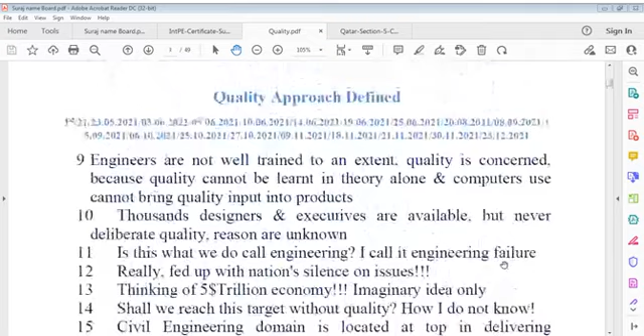This is a new proposal today. Quality in Bharat, India, where does quality exist? That is the question here. Quality hai kahan? And we discussed about this some.

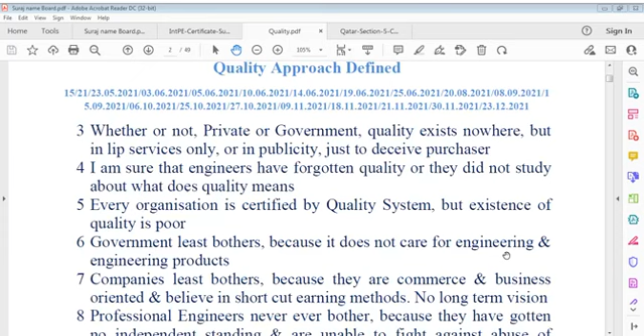Just degrees are not adequate, you can say, even if it's a doctorate, until the engineer's attainment or engineer's educational standards and practical aspects tally together.

If your work does not prove that it is quality one, in that case we have to conclude that our education is not up to the mark it should be. Some defect lies in education, and that defect is that we are not oriented on the practicalities of engineering, but just a theoretical approach is adopted, and we think this is a milestone we have achieved.

If someone has got BE or a first degree in engineering, or then a second engineering degree which is master's, or the top engineering degree which is doctorate, as far as degrees are concerned, it's nice to have as many as possible, but the degree of experience is something different, I think.

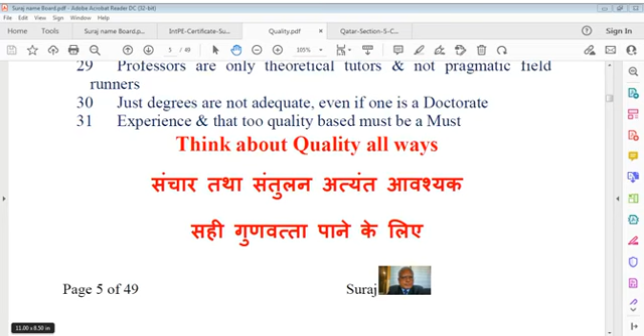New designs come in. But as far as the civil engineering world is concerned, permanent works are not only for years, it is for life. Yes, I am talking of roads and not very much interested because you have to repair it every year. But for structures, I'm talking structures which are meant for many, many decades to come, where our savings, you can say life savings, go on to be invested in. Otherwise, we can't get development work done. That's behind this consideration here.

Try to explain because of the seriousness in this case. And we have here our file of concrete. We can say it's talking about concrete.

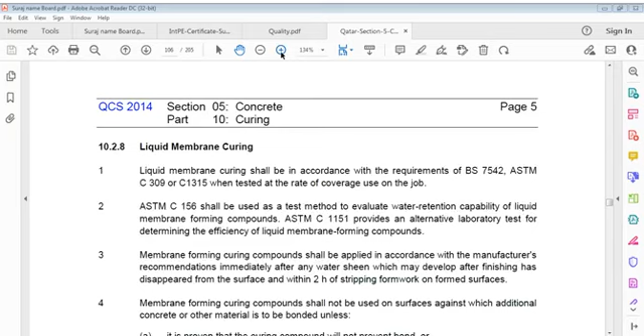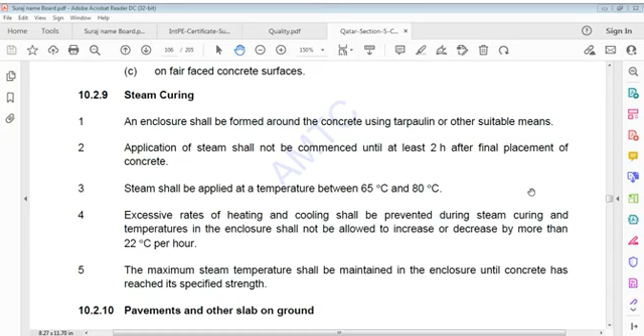Last time we talked about liquid membrane, and we can say steam curing, we talked of about 65 to 80 degrees Celsius, and fluctuation in temperature not to exceed 22 degrees Celsius per hour, and maximum steam temperature to be maintained in the enclosure until concrete has reached. And we talked of bridges, pavements and other slabs on ground, and then building bridges and other structures. Additional curing shall be provided after removal of forms.

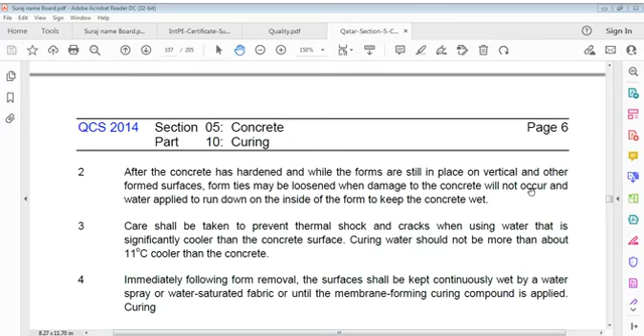So we discussed about that also, about the 11 degrees difference of temperature. We said the very important point was 11 degrees, that curing water should not be more than about 11 degrees Celsius cooler than concrete. It's an important point. If concrete is 35 degrees Celsius, for example, 35 minus 11 is 24, so water should be 24. If concrete is 30, same way it should be 19. Likewise, this is just the range, and not more than that.

Mass concrete we discussed, and we discussed about how these specific materials work.

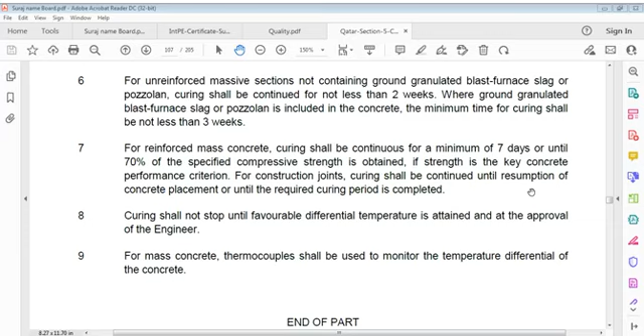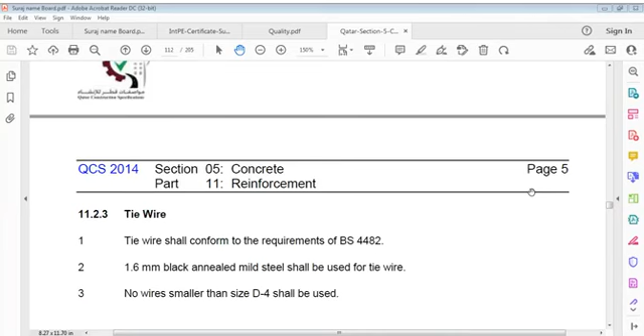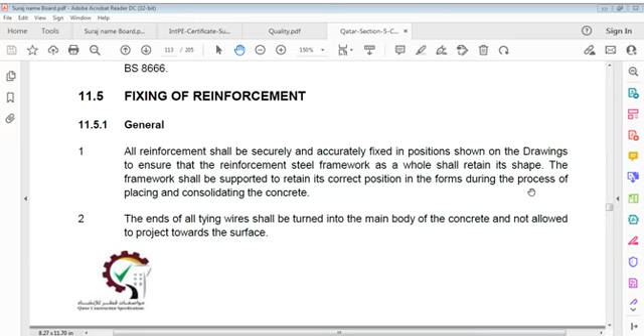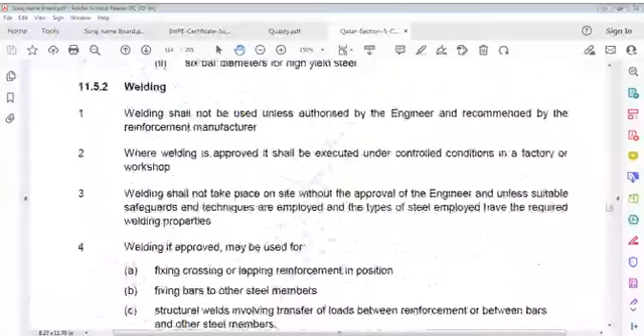We talked of welded steel wire fabric and tie wire, cutting and bending of reinforcement, fixing reinforcement, mechanical splices, and bundling and splicing of bundle bars. So we can say welding, I think we are done. Let me read it better, so we will know what we did and what we didn't.

For welding, welding shall not be used unless authorized by engineer and recommended by reinforcement manufacturer. So this was done. Where welding is approved, it shall be executed under controlled conditions in a factory or workshop.

Where welding is approved, it shall be executed under controlled conditions in a factory or workshop. Welding shall not be done on site without approval of engineer, and unless suitable safeguards and techniques are employed, and types of steel employed have the required welding properties.

Welding, if approved, may be used for fixing crossings or lapping reinforcement in position, fixing bars to other steel members, and structural welds involving transfer of loads between reinforcement or between bars and other steel members.

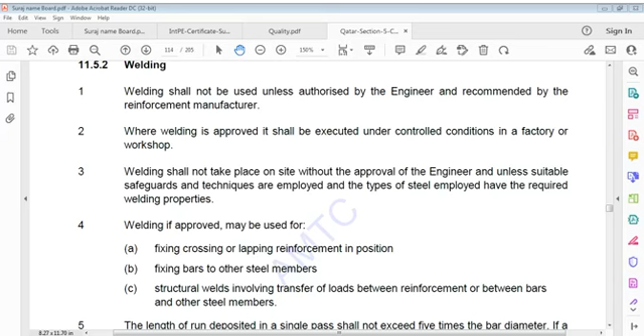Length of run deposited in a single pass shall not exceed 5 times bar diameter (5D). If a longer weld length is required, welds shall be divided into sections with the space between runs made not less than 5 times bar diameter.

Butt welds shall be formed by flash butt welding or metal arc welding. Other methods may be approved subject to satisfactory performance in trial joints. Metal arc welding or electrical resistance welding may be used for fixing suitable steels or for lap joints. Flash butt welding shall be executed with correct combination of flashing, heating, upsetting and annealing, using only machines which automatically control this cycle of operations.

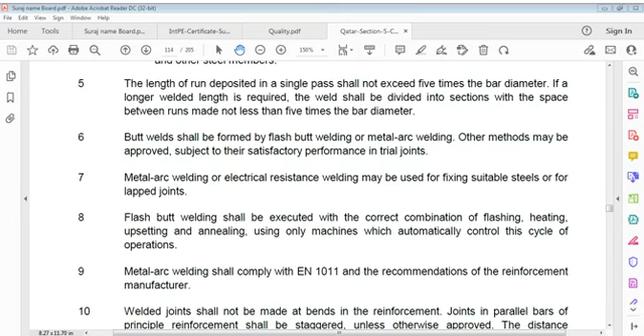Metal arc welding shall comply with European Union EN 1011 and recommendations of reinforcement manufacturers. Welded joints shall not be bent, and welded joints shall not be made at bends in reinforcement. Joints in parallel bars of principal reinforcement shall be staggered, and shall be not less than an anchorage length apart.

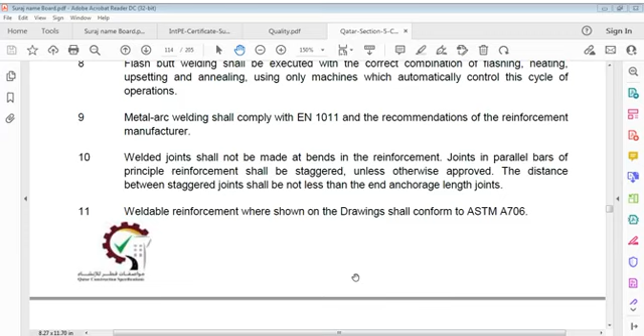Weldable reinforcement, where shown on drawing, shall conform to ASTM A706. Mechanical splices shall comply with BS 8666 and shall be used as and where indicated on drawings. Details of mechanical splices shall be submitted to engineer for approval.

Bundling and splicing of bundle bars shall be in accordance with BS 8666. Splicing, except where indicated on drawings or approved, shall not be permitted without approval of engineer.

Contractor shall notify engineer at least 24 hours before commencing fixing of reinforcement in order to facilitate inspection of formwork. Contractor shall ensure that access areas to receive reinforcement are cleaned before fixing.

Reinforcement to be fixed shall not be placed in contact with non-ferrous metals. Concrete cover to reinforcement shall be maintained with the aid of approved spacer pieces. Cover shall not be less than given in Section 5 Part 6.

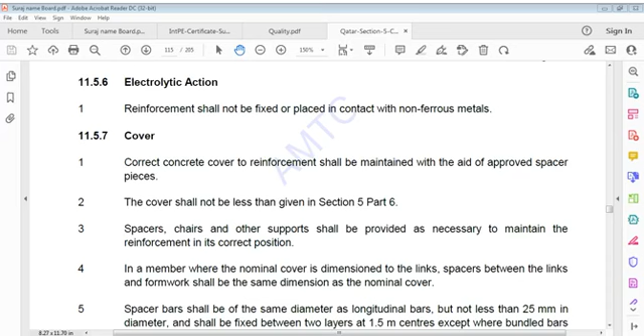Spacers, chairs, and other supports shall be made of concrete, plastic, or other materials, to the approval of engineer. Where supports are made of concrete, they shall have at least the same cube strength as the concrete.

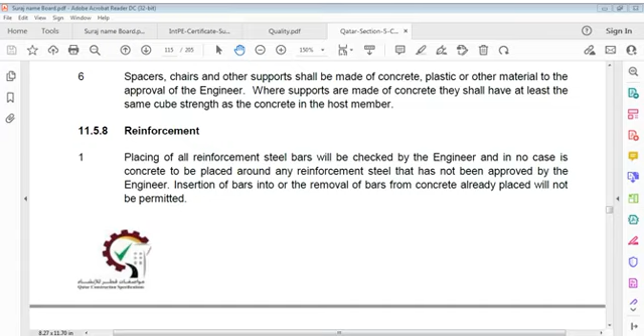Placing of all reinforcement steel bars is to be checked by engineer, and in no case is concrete to be placed around any reinforcement steel that has not been approved by engineer. Insertion of bars into, or removal of bars from, concrete already placed is not permitted.

I think we had gone through this already, but I'm just reading it again. Reinforcement steel temporarily left projecting from concrete at joints shall not be bent without prior approval. Damage to forms and linings shall be avoided. Reinforcement shall not be fixed until completion of placing tanking membrane protection.

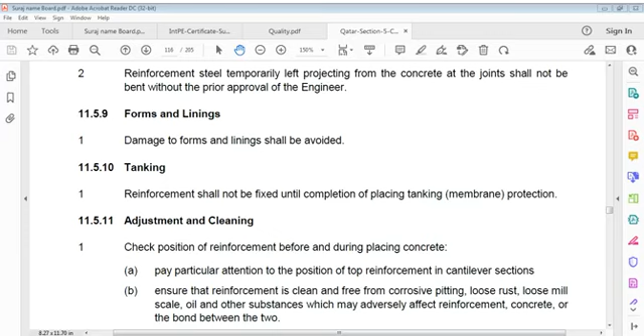Adjustment and cleaning, checking the position of reinforcement before and during placing of concrete. Adjustment and cleaning is a very important point, done before and during concrete placing. Pay particular attention to the position of top reinforcement in cantilever sections.

We have done this. Sorry, some problem in my throat.

Ensure that reinforcement is clean and free from corrosive pitting, loose rust, mill scale, oil and other substances which may adversely affect reinforcement concrete or bond between the two.

Protect projecting reinforcement from weather where rust staining of exposed concrete surfaces may occur.

At time of concreting, all reinforcement steel shall have been thoroughly cleaned and freed from all mud, oil, or any other coating that might destroy or reduce bond.

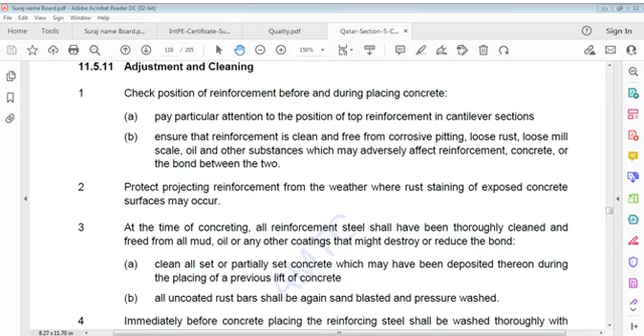Immediately before concrete placing, reinforcing steel shall be washed thoroughly with high pressure potable water jets to remove any deposited salts.

Protective coating to reinforcement. All foregoing clauses of this part apply equally to epoxy coated reinforcing bars. Reinforcing steel which are to be coated shall be free of slivers, scabs, excessive pitting, rust, grease, oil, and other surface defects detrimental to proper coating. Surfaces shall be prepared in accordance with ISO 14654.

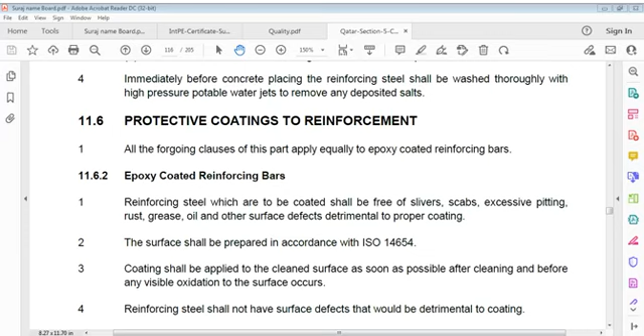Coating shall be applied to cleaned surfaces as soon as possible after cleaning and before any visible oxidation to surface occurs. Reinforcing steel shall not have surface defects that would be detrimental to coating.

Epoxy resin powders which do not meet these requirements must be tested by an approved independent testing laboratory and must be accepted by engineer before use.

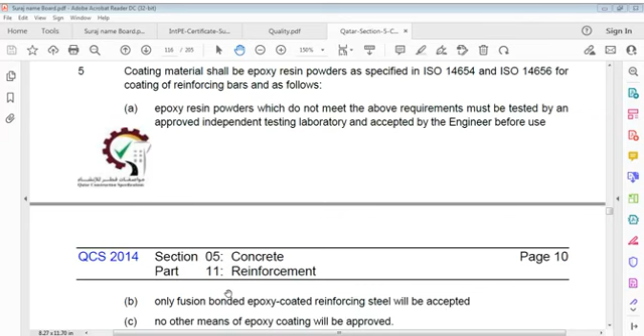Only fusion bonded epoxy coated reinforcing steel shall be accepted. No other means of epoxy coating shall be approved.

Patching material shall be furnished by epoxy coating manufacturer, compatible with coating, inert in concrete, suitable for repairs to coated reinforcing bars, to be made by coating applicator and contractor at project site.

Fabrication shall be performed before coating except as hereafter specified for bent bars and straight bars less than 7.6 meters long. Bent reinforced steel bars shall be coated after bending unless fabricator can show that satisfactory results can be achieved.

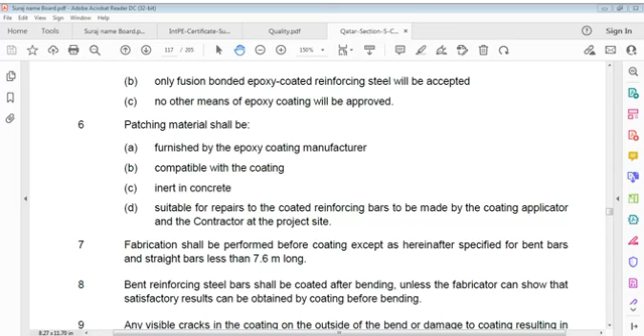Coating on outside of bend or damage to coating resulting in debonding of coating after bending shall be rejected. Bars less than 7.6 meters long may be sheared or sawn to length after coating, provided damage to coating does not extend more than 12mm back.

Cut end is patched before any visible oxidation appears. Flame cutting shall not be permitted.

Epoxy coating shall be checked visually after cure for continuity of coating and shall be free from holes, contaminations, cracks and damaged areas. There shall not be more than 2 holidays, pinholes not visually discernible, in any 300mm of epoxy coated bar.

A holiday detector shall be used in accordance with manufacturer's instruction to check epoxy coating for holidays. A 67.5 volt detector such as Tinker and Rasor model M-1 or approved equivalent shall be used.

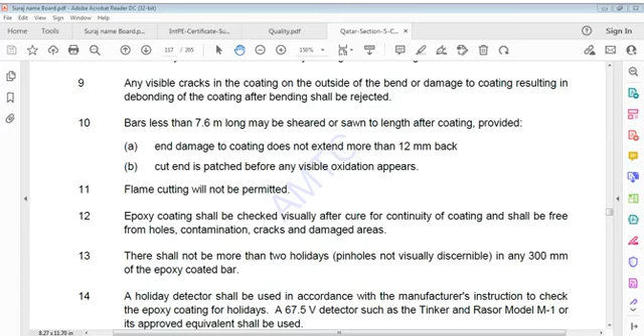Patching of holidays is not required if there are less than 3 holidays per 300mm length. Bars having 3 or more holidays per 300mm shall be cleaned and recoated or replaced.

As directed by engineer, epoxy coating film shall be cured and or post cured to a full cured condition.

Representative proportion of each production lot shall be checked by epoxy coating applicator using method most effective for measuring cure, to ensure that entire production lot of epoxy coating is supplied in full cured condition.

Contractor shall repair all coating damaged by fixtures used to handle or support bars in coating process as follows: patching shall be done as soon as possible and before visible oxidation occurs. Excessive patching requires correction.

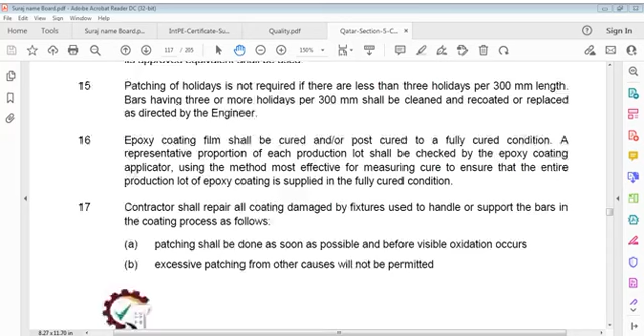Satisfactory correction shall consist of proper adjustment of process and rerunning bars through plant.

Engineer reserves right for access to epoxy coating applicator's plant to witness epoxy coating processes for project work and to obtain specimens from test bars for whatever testing desired.

All chairs, tie wires and other devices which are used in connecting, supporting, securing or fastening epoxy coated reinforcing steel bars shall be made of or coated with dielectric material.

All chairs, tie wires and other devices used in connecting, supporting, securing or fastening epoxy coated reinforcing steel bars shall be made or coated with a dielectric material.

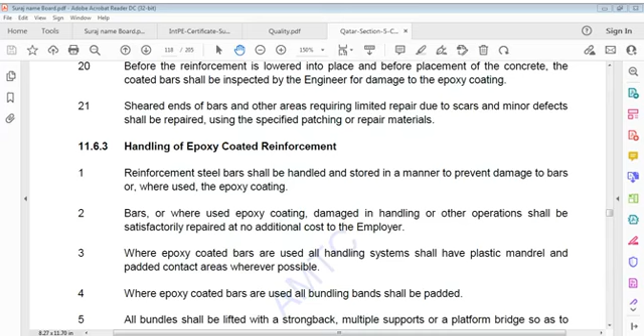Reinforcement steel bars shall be handled and stored in a manner to prevent damage to bars or wherever used, the epoxy coating.

Reinforcement steel bars shall be handled and stored in a manner to prevent damage to bars or wherever used epoxy coating. Bars or epoxy coating damaged in handling or other operations shall be satisfactorily repaired at no additional cost to the employer. Where epoxy coated bars are used, all handling systems shall have plastic mandrel and padded contact around contact areas where possible.

Where epoxy coated bars are used, all bundling bar bands shall be padded. All bundles shall be lifted with a strongback, multiple supports, or a platform bridge so as to prevent bar to bar abrasion from sags in the bar bundle.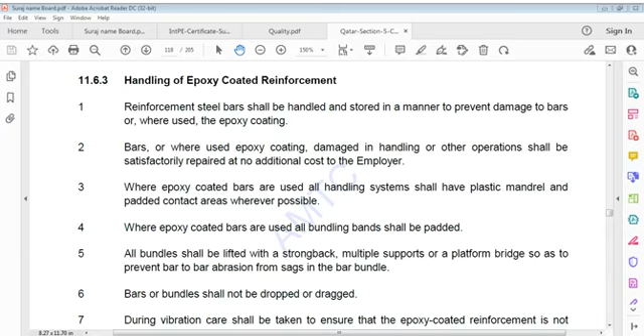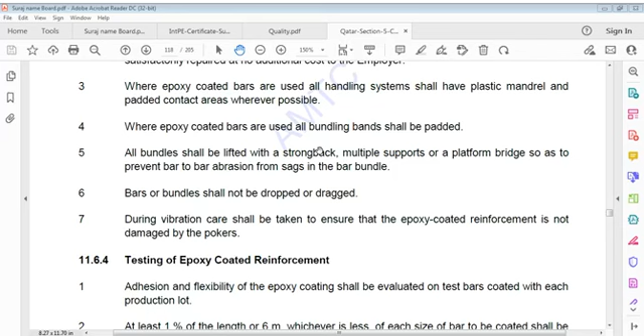Bars or bundles shall not be dropped or dragged. During vibration, care shall be taken to ensure that epoxy coated reinforcement is not damaged by pokers.

Testing of epoxy coated reinforcement: adhesion and flexibility. Adhesion and flexibility of epoxy coating shall be evaluated on test bars coated with each production lot. At least 1% length, or 6 meters, whichever is less, of each size of bar to be coated shall be furnished as test bars. Test bars may be in one length or multiple lengths as required to have one test bar of each size with each production lot.

Production epoxy coated test bars shall be evaluated by bending 120 degrees after rebound around a mandrel of diameter corresponding to the size of the bar, as given in the table.

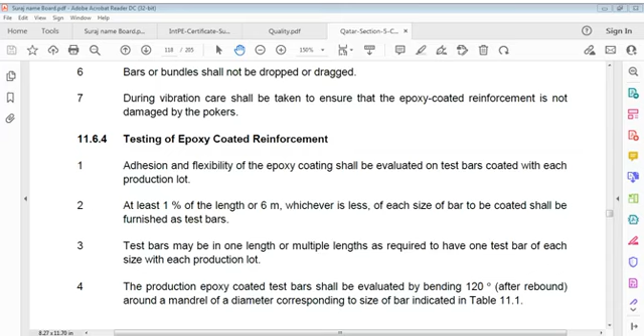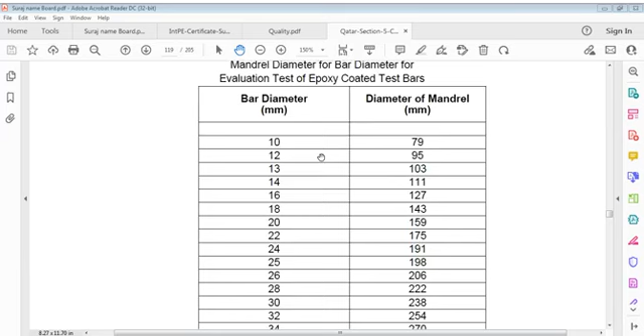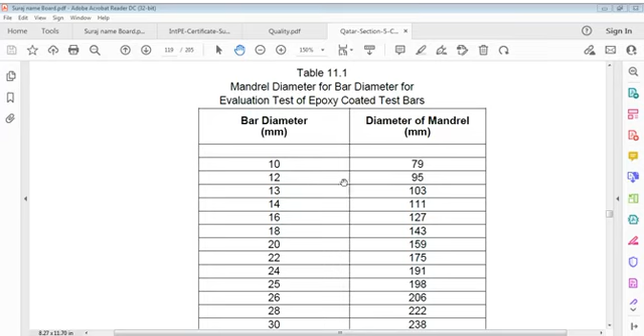Of course, we have gone through this again. For 10 mm the bar diameter corresponds to a mandrel diameter of 79, for 12 mm it's 95 - that's the bar diameter and mandrel diameter relationship. For 10 mm it's 79, for 12 it's 95, for 13 something similar, for 14 it's 111, 16 is 127, 18 is 143, 20 is 159 - approximately 8 times the bar diameter. I think it's about 8 times, maybe slightly less than 8 times approximately. But I understand the relation between mandrel diameter and bar diameter is approximately 8 times. For 10mm it's 79 (close to 80), for 12mm it's 95 - likewise about 8 times, generally speaking.

The bend shall be made at a uniform rate and may take up to 1 minute to complete.

Bend test shall be conducted at room temperature, between 20 degrees Celsius and 30 degrees Celsius, after the specimen has been exposed to room temperature for sufficient time to ensure it has reached thermal equilibrium. No cracking of the epoxy coating shall be visible to the naked eye on the outside radius of the bent bar.

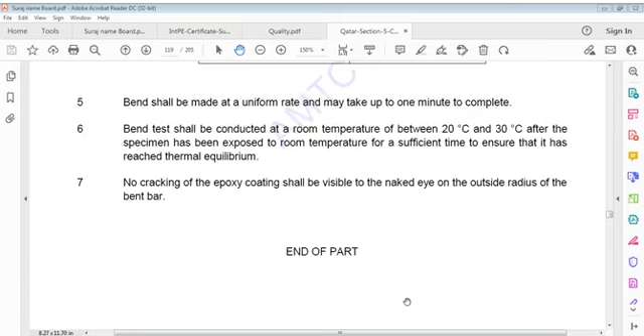Now we are going to joints. We were talking about joints last time.

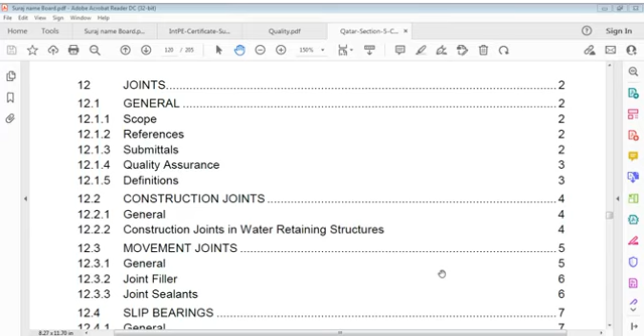When we are talking of construction joint - what is a construction joint? It's an important point to care about - construction joint.

Where construction joints are required... let me just take a minute... where construction joints are required, in slabs or beams. Very cold it is, what to do?

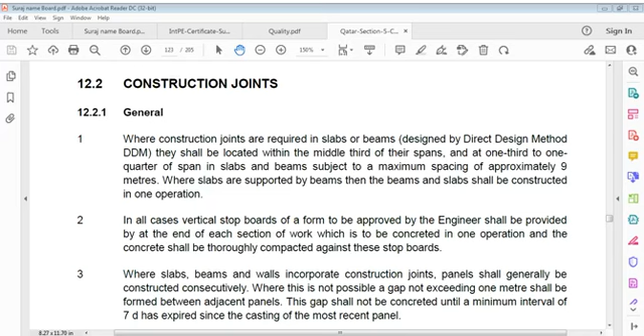Size of bays for reinforced floors, walls and roofs shall be as shown on drawings, but in no event shall they exceed 7.5 meters in either direction, and 6 meters when unreinforced or with nominal reinforcement.

Horizontal construction joints in walls will only be permitted when the wall is continuous with the floor slab. Walls shall be keyed on cast kickers 150 mm high, or on tops of walls meeting soffits of suspended members.

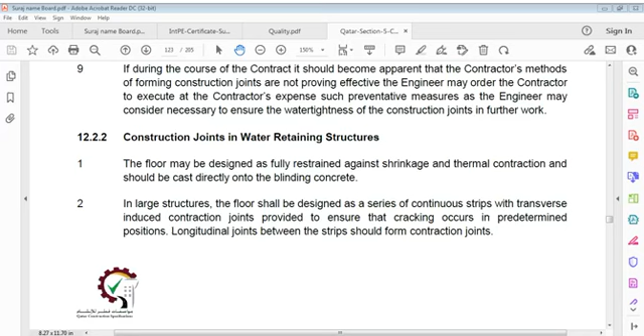Longitudinal joints between strips should incorporate water stops. Water stops shall be incorporated into construction joints, crack induced joints, contraction joints, and expansion joints in water retaining structures. Contractors shall ensure that all such joints are watertight, and any joints which may leak or weep shall be rectified by the contractor to the engineer's satisfaction.

Spacing of construction joints, crack induced joints, contraction joints, and expansion joints in water retaining structures shall be shown on the design drawing. Where the position or type of joints are not indicated on drawings, spacing of construction joints or crack induced joints in water retaining structures shall not exceed 5 meters. For ground floor slabs, construction joints, crack induced joints, contraction joints, and expansion joints shall be incorporated into the works as appropriate for slabs on grade.

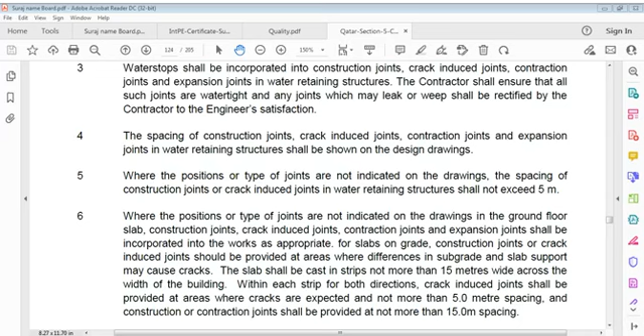Construction or contraction joints shall be provided between adjacent strips.

Water stops of a type acceptable to the engineer shall be embedded in concrete. Water stop should be made of a high quality material which must retain its resilience through the service life of the structure for the double function of movement and sealing. Surface of water stop should be carefully rounded to ensure tightness of joint even under heavy water pressures.

To ensure good tightness with or without movement of joints, water stop should be provided with anchor parts. Cross section of water stop should be determined in accordance with presumed maximum water pressure and joint movement.

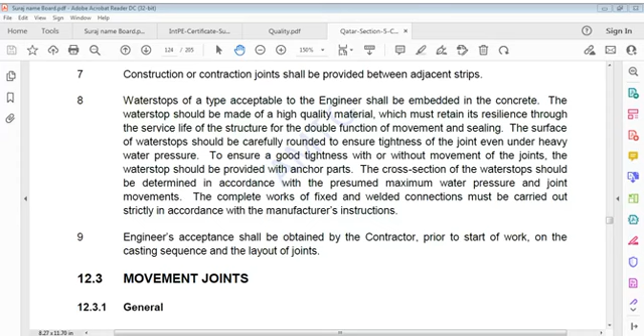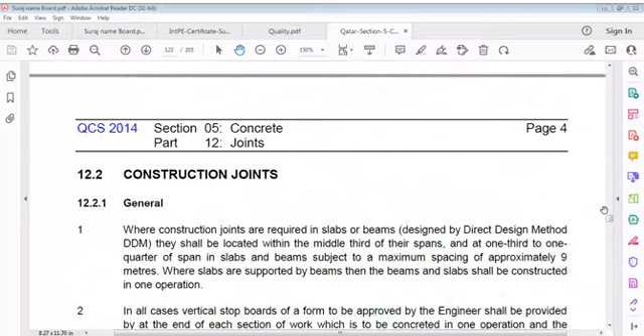Let me go back to explain these joints again. Construction joint: surface where two successive placements of concrete meet, across which it is desirable to develop and maintain bond between the two concrete placements, and through which reinforcement which may be present is not interrupted.

Contraction joint: a formed, sawed or tooled groove in a concrete structure to create a weakened plane and regulate the location of cracking resulting from dimensional change in a different part of the structure.

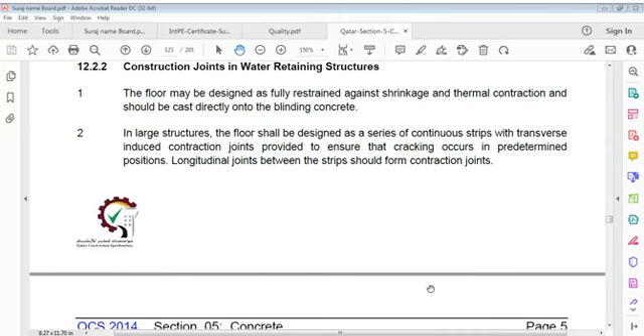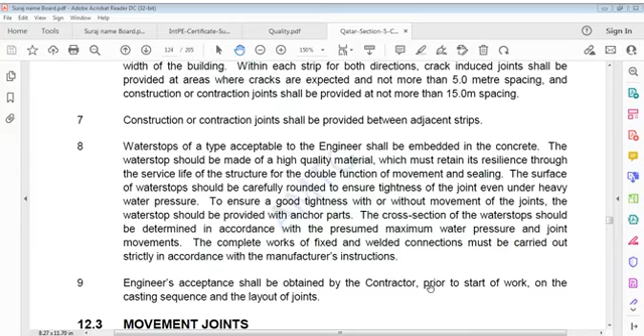We discussed construction joints and water retention already, I think. Now, movement joints.

Movement joints for expansion and contraction shall be constructed in accordance with details and to dimensions shown on drawings, or where otherwise ordered by the engineer, and shall be formed of the element specified. Movement joints in water retaining structures shall be in accordance with details and dimensions shown on drawing.

Contractors shall pay particular attention to the effect of climatic extremes on any material which may be desired for use on any movement joint, and shall submit for approval by the engineer proposals for proper storage, handling and use of said materials, having due regard for whatever recommendations are made by manufacturers in this connection.

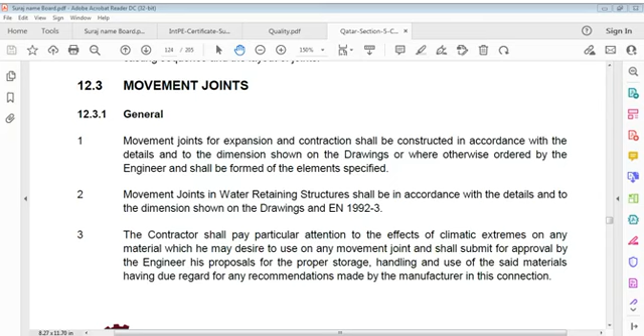Joint fillers shall conform to the requirements of BS 6093 or ASTM D1751, or equivalent, if they are bituminous type, or the requirements of different equivalent codes if they are polymer foam type.

Both bituminous and polymer foam types are available. Joint filler shall be fixed to the required dimensions of the joint cross section and shall provide a firm base for joint sealer.

When required between two concrete surfaces as a resilient movement joint, the filler shall be an approved granulated cork bound with insoluble synthetic resin.

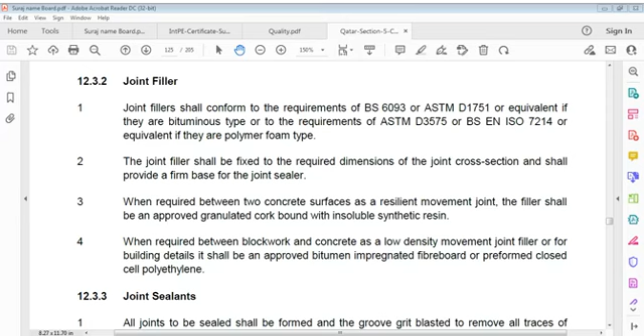Joint sealant: all joints to be sealed shall be formed and grooved, grit blasted to remove all traces of deleterious materials such as form oil or curing compounds, and also to remove whatever surface laitance from the sides of the joint.

All joints to be sealed shall be formed and grooves grit blasted to remove all traces of deleterious materials such as form oil or curing compounds, and also to remove whatever surface laitance from the sides of the joint.

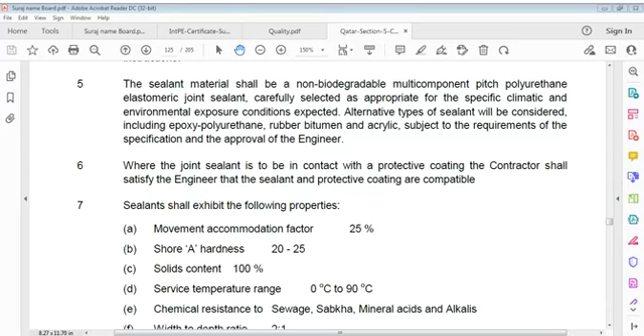Sealants shall exhibit the following properties: movement accommodation factor 25%, Shore A hardness 20 to 25, solid contents 100%, service temperature range 0 to 90 degrees Celsius, chemical resistance to sewage, Sabkha, mineral acids and alkalis, and width to depth ratio of 2:1.

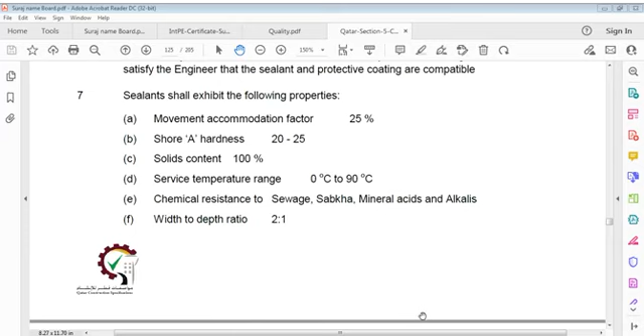Where shown on drawings, sealants shall also be suitable for use with potable water. All surface preparation, priming, mixing and application shall be carried out in strict accordance with manufacturer's instructions. Sealant shall have a proven track record of no less than 10 years under similar local conditions.

Sealant shall have a proven track record of no less than 10 years under similar local conditions.

Slip bearings, general. Slip bearings shall be preformed, low friction bearing strips to form a thin sliding joint.

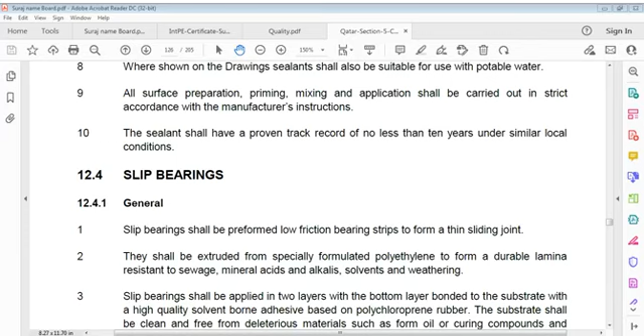Slip bearing shall be preformed, low friction bearing strips to form a thin sliding joint. This shall be extruded from specially formulated polyethylene to form a durable lamina resistant to sewage, mineral acids and alkalis, solvents and weathering. Slip bearings shall be applied in two layers, with the bottom layer bonded to the substrate with a high quality solvent borne adhesive based on polychloroprene.

Applied loads - the substrate shall be clean and free from deleterious materials such as form oil, or curing compounds, and surface laitance. Surface shall be level and even along the full length of joints. Applied loads for slip bearings shall not exceed 0.7 MPa.

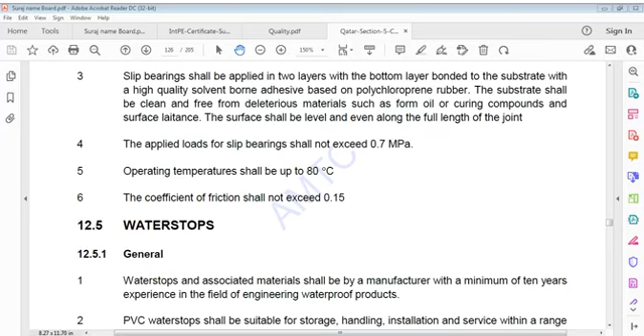Operating temperature shall be up to 80 degrees Celsius. Coefficient of friction shall not exceed 0.15. Water stops, general. Water stops and associated materials shall be by a manufacturer with a minimum 10 years experience in the field of engineering waterproof products.

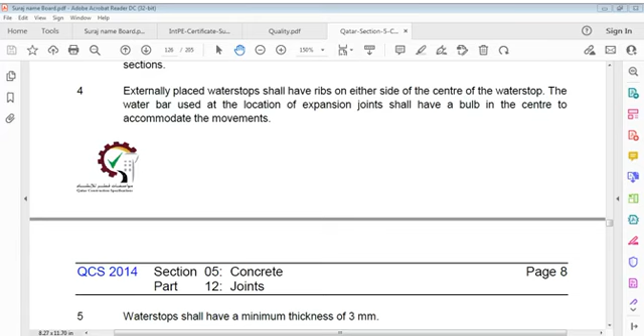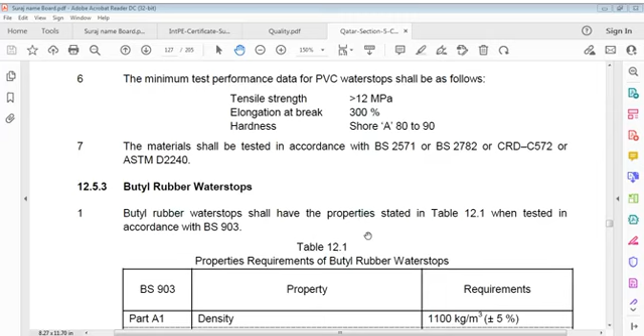Water stop shall have a minimum thickness of 3 mm. Minimum test performance data for PVC water stops shall be as follows: tensile strength greater than 12 MPa.

Elongation at break 300%. Hardness shore A 80 to 90. Material shall be tested in accordance with BS2571 or BS2782 or CRD C572 or ASTM D2240.

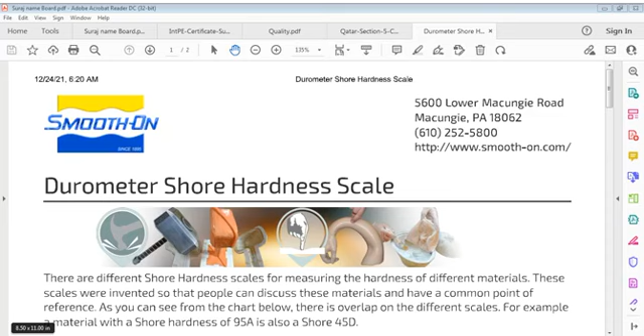This is what it says: Durometer shore hardness scale.

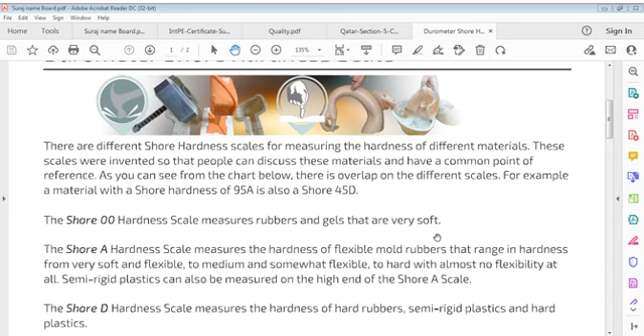There are different shore hardness scales for measuring hardness of different materials. These scales were invented so people can discuss these materials and have a common point of reference. You can see from the chart below there is overlap on different scales. For example, a material with a shore hardness of 95A is also shore 45D.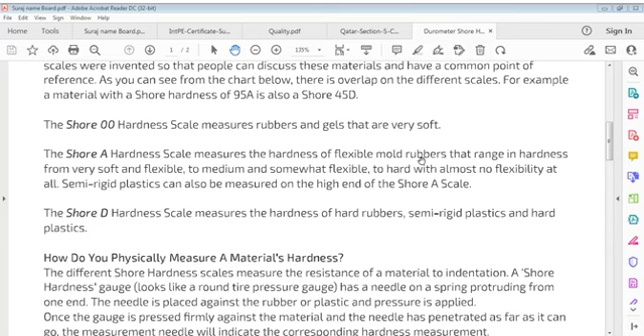Shore 00 hardness scale measures rubbers and gels that are very soft. Shore A hardness scale measures hardness of flexible mold rubbers that range from very soft and flexible, to medium and somewhat flexible, to hard with almost no flexibility at all. Semi-rigid plastics can also be measured on the high end of the Shore A scale. Shore D hardness scale measures hardness of hard rubbers, semi-rigid plastics and hard plastics.

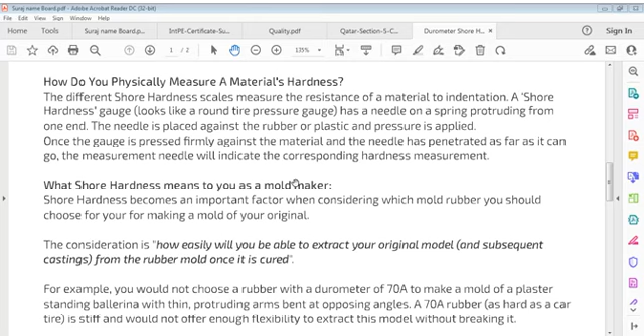How do we physically measure a material's hardness? Different shore hardness scales measure resistance of materials to indentation. A shore hardness gauge looks like a round tire pressure gauge with a needle on a spring protruding from one end. The needle is placed against rubber or plastic and pressure is applied. Once the gauge is pressed firmly against the material, the needle has penetrated as far as it can go, and the measurement needle indicates the corresponding hardness measurement.

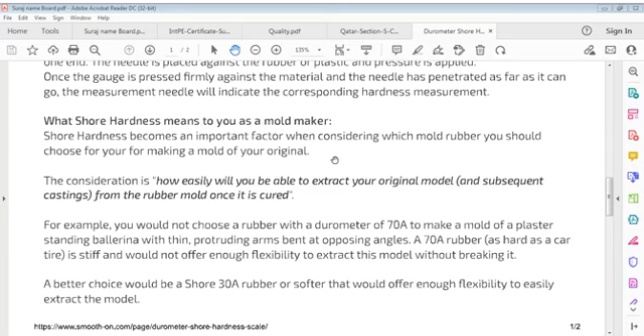What does shore hardness mean to you as a mold maker? Shore hardness becomes an important factor in considering which mold rubber you should choose for making a mold of your original. One consideration is how easily you'll be able to extract your original model. For example, you would choose rubber hardness accordingly.

Under what circumstances would you use a shore 70A rubber? A common application we encounter is in the world of concrete casting, which would be making molds of flat original models like paving stones. This model configuration does not require much flex from the rubber mold to extract the original or subsequent castings.

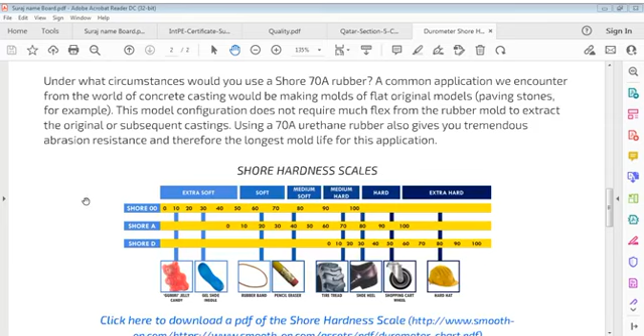So you can say where shore is 45 on the 00 scale, that's where shore A starts, and where shore A is 65 or 60 somewhere, that's where shore D starts.

For example, shore 00 of 10 is jelly, candy, gummy, and shore 00 of 30 is gel shoe insole. Likewise, a rubber band is shore A20 or shore 00 60. Same with a pencil eraser, for example, it falls in two ways: shore 00 76 and shore A40. Same way tire tread falls in three ranges: shore 00 95, shore A70 and shore D15. So we can say this is about hardness.

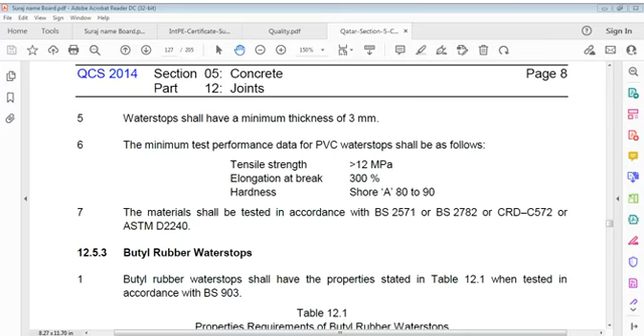Butyl rubber water stop. Butyl rubber water stops shall have properties stated in Table 12.1, and tested in accordance with BS 903.

Properties and requirements of butyl rubber water stops, per BS 903: Part A1, Part A26, Part A2, Part A2, and Part A6. These properties are: Part A1 is density, Part A26 is hardness, Part A2 is tensile strength, Part A2 is elongation at break point, and Part A6 is water absorption after 48 hours immersion.

Requirements: density, Part A1, is 1100 kilograms per meter cubed, plus or minus 5%. Part A26, hardness, should be 60-70 IRHD.

Hardness noted, then Part A2, tensile strength, not less than 17.5 Newtons per millimeter squared. Then Part A2, elongation at break point, not less than 450% - we're talking of butyl rubber, mind it. And Part A6, water absorption after 48 hours immersion, not exceeding 5%.

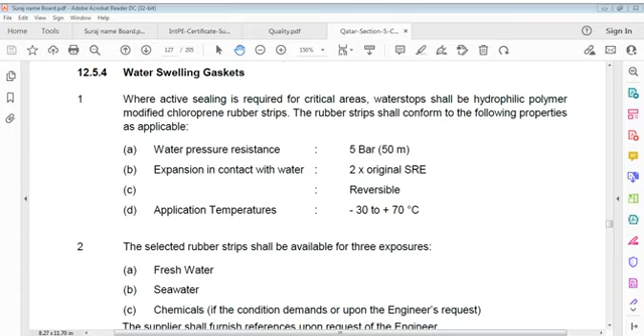Selected rubber strips shall be available for 3 exposures: fresh water, seawater, chemicals, if condition demands or upon engineer's request. Supplier shall furnish references upon request by engineer.

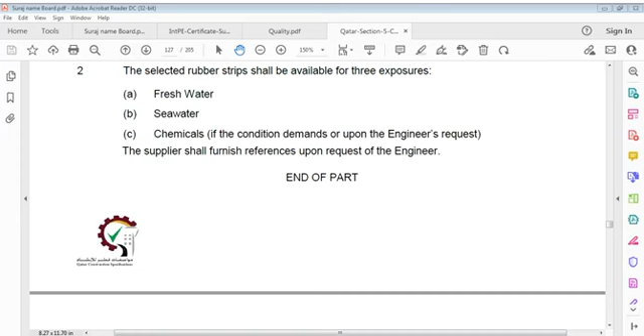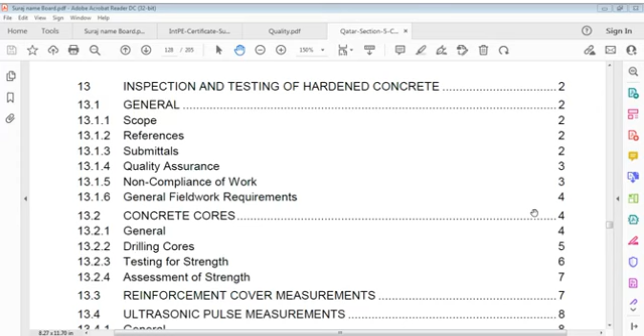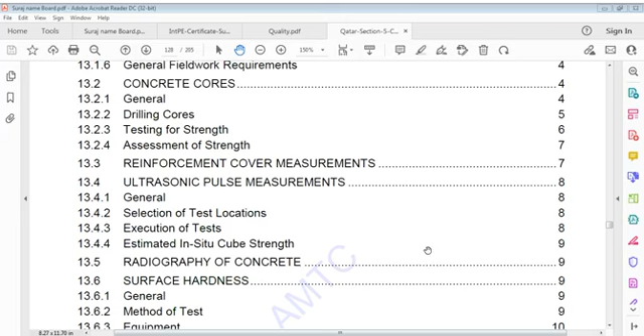Then we have concrete cores: general drilling cores, testing for strength, assessment of strength, reinforcement cover measurements, ultrasonic pulse measurements, selection of test locations, execution of tests, estimated in-situ cube strength, radiography of concrete, surface hardness, general method of test, equipment, reporting, chemical content, sampling, laboratory testing.

Concrete, everybody knows, is a very important and expensive material that we use in construction. We use it for permanent inclusion as well as sometimes for temporary inclusions, but that's very nominal, a very small quantity. If we consider it for permanent work, it's really permanent, because of concrete, other materials which are embedded, like steel reinforcement, are used. If there is no concrete, steel reinforcement cannot be used. If there is no concrete, we cannot make buildings like we make in the current era.

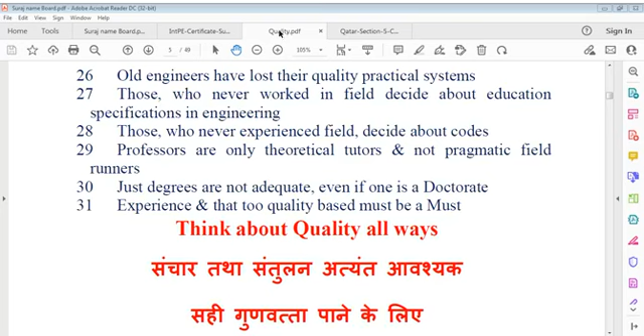And that's my question here: inspection and testing of hardened concrete. It's not only inspection and testing, but also design of concrete. When we design structures, we keep in mind all these properties that concrete provides us for use. And if we don't have good, qualitative construction, we cannot use those properties.

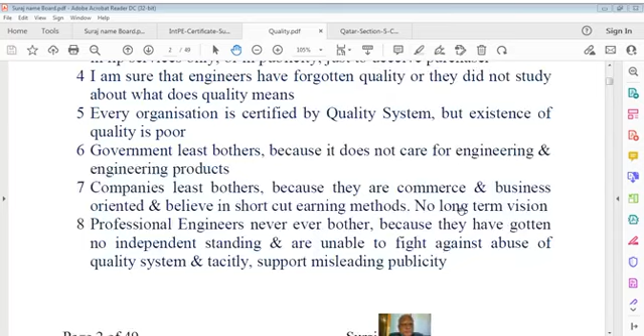That's why I say, think about quality always. And that's why I gave you this talk of little concern, or immense concern you may say, on quality in concrete. Where does it stand? That point we have to see as professionals. It's our duty to look into that, or else we stop calling ourselves professionals. We'll take up this issue of concrete in the next talk.

Because as far as I'm concerned, as an individual and as an engineer, I consider concrete a very important, very significant, very reliable material in our lives. I will not give that much importance to finishing items or supplementary items like bricks or blocks. For example, blocks are also constructed of concrete, and brick is constructed from clay. Yet we rely on concrete itself to the maximum extent, and we have to think of it.

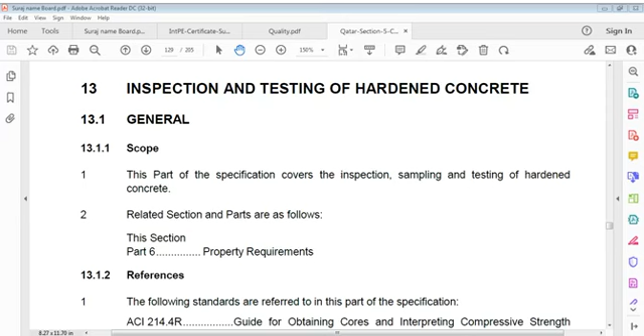That's the reason I try to involve myself personally in this talk, because after all, it's a matter of importance, very high importance.

I've seen how concrete work is done. I worked in Qatar, Abu Dhabi, and Iraq, which I can consider first. I worked in Iraq in 1981-82, and also in Qatar from 1985 to 89, and also in 1995-96, and 2000, 2003 to 2004, and 2004 to 2005, and then 2000 to 2003. I've done a lot of work on that, and I can say I learned from there much more than some institutions could teach me from all over the world.

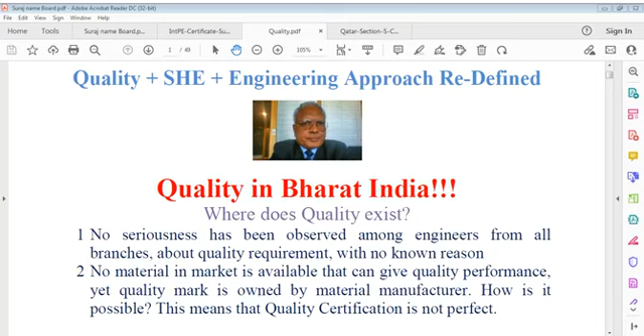I owe my experience to something that has been an institution of continuous learning, a field institution, or you can say a site institution. I value site institutions, field institutions, more than whatever university or other institutions provide. My concern is a little different. I will take up this issue later on. I close it now. Thank you very much, and I hope you will enjoy.